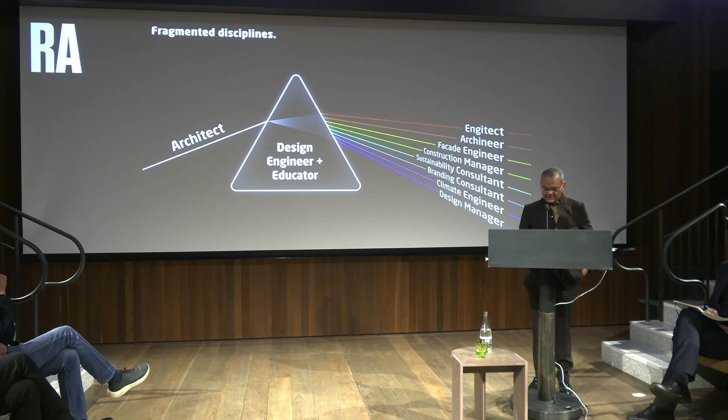I noticed also that the discipline historically has been fragmented enormously, to a point where today you can be an engitect, archineer, facade engineer, blah blah blah. I wanted to bring all of that back to what Soane did, which I think was the total builder, client, and everything else. Now of course that's a retrospective comment, but those are the kind of things I was interested in. And this particular observation has gotten worse.

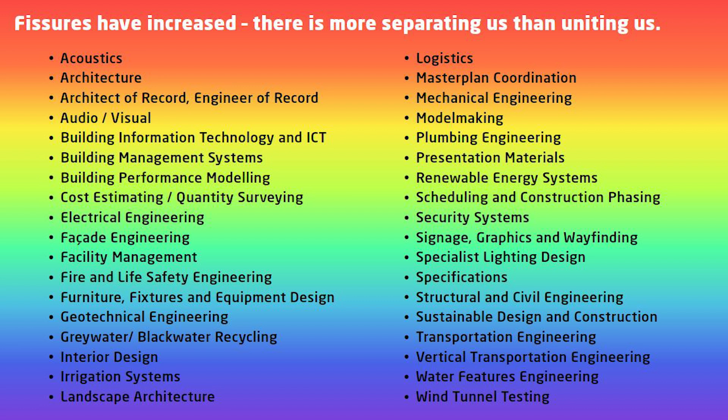I just made this slide very recently - in one of our projects there are 36 fissures. So there is a real opportunity, because there are more things separating us than unifying us in the world of making architecture and making design.

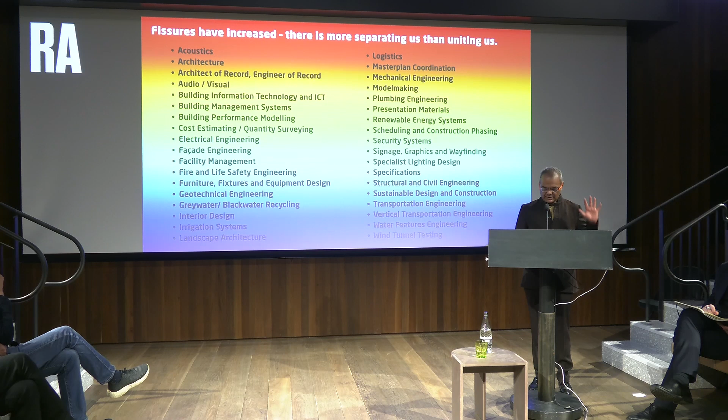And I thought, how do I then project this and continue at least propagating what we might be able to do. So I'm not going to show a lot of projects, because that becomes a show and tell, and I don't want to do that. I want to try and explain how I think I've got here.

One of the things is examining medieval methods - you very quickly realize that we have lost a lot since then in terms of what we do today. To fast forward that quickly, I'm particularly interested in interdisciplinary conversation, which means integrating knowledge from different disciplines without losing the strength of your expertise. It's subtle, but it's something I believe in very strongly, that I think is fundamental.

The problem is the transdisciplinary crisis that we have needs all of us, and you cannot do it through any particular discipline. I think when we look back all the way to the coherence of the medieval Summa, which gave way to this kind of specialization, we start to see that we need to find another framework of unity.

So as a kind of response to that, the practice that I have designed with my colleagues - and I want to thank them, there are many of them in here, my co-pilots at AKT - I don't do all of this on my own, by the way.

I decided that my role would be to step back as well as do some amazing buildings. I would also try and theorize at least what we could do as a practice. That's been a very deep interest, both academically and in practice, and we've published quite a bit of that.

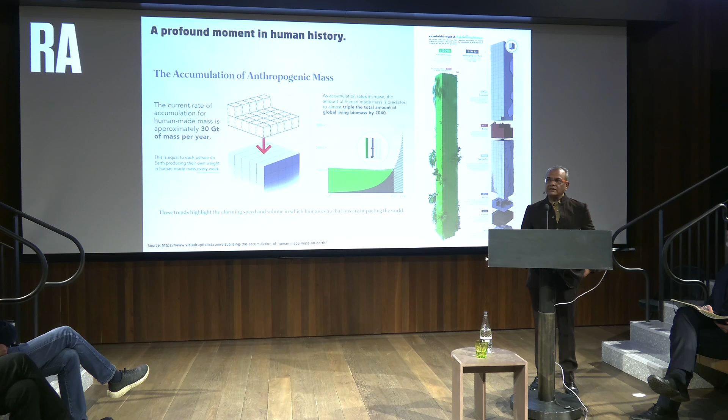The other dangerous thing that's happened is in 2020, we started to think, where is the crisis? And at the same time, 2019, 2020, we discovered that we as society had exceeded the anthropogenic mass. In 2020, the Weizmann Institute showed us that we'd made more material than what was already there from nature. And what's worse is by 2040, we will actually triple this.

The other important provocation is the two front lines, one planet that's de-globalizing, and yet we separate this global south and global north. And when we look at old research, this is not new, we see that all the new opportunities are going to be in the global south, and we are going to have to live with everything we've already built and improve that.

So there is this binary kind of research, yet it misses out Africa, it misses out the Middle East, it misses out all sorts of things. But nonetheless, I took this as a position.

And I thought, well, what about the 2 billion people that are living in informal houses? Why are we saying we shouldn't build? So there are these sorts of questions that struck me, and I started looking more and more at it.

And I see that in the 60s, there was a hypothesis, and many of you will be familiar with the population bomb. The hypothesis was, by Ehrlich and others at the time, that it was those poor people over there that are going to kill the rich people over here. That has now been proven wrong.

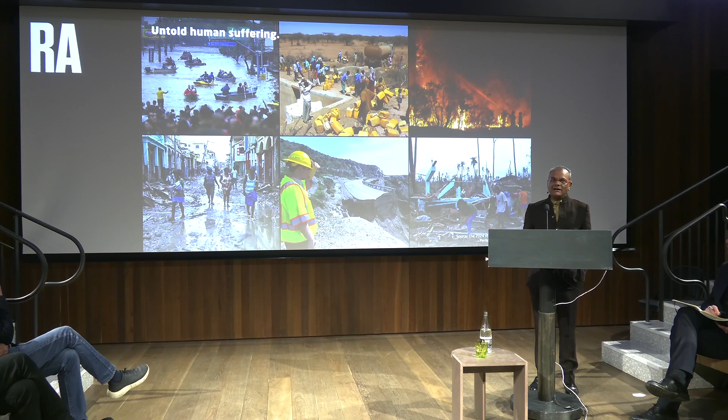Most of the problems have actually been upside down. The problems of the others, as we call them, have been largely created in reverse by consumption, not population. So it became quite an interesting thing. How does an engineer start to deal with that? Because all we're supposed to do is make buildings stand up.

When we look at the life support system of the planet, we see it's getting worse and worse. We've crossed recently, assessing 9 boundaries, we've crossed 6 of them. So in a way, there is a crisis going on, but I'm still very hopeful and very optimistic.

And I think in that hope, I've started to, since 2017, rethink everything we'd done before that and look at excellence in a completely different way, with new insights, new ways of thinking, but redefining more than anything else what value means. Value to us in our office, whether my colleagues believe it or not, the way I try to shove it down people's throats is, look, these are the 3 things we do it: value, complexity, efficiency.

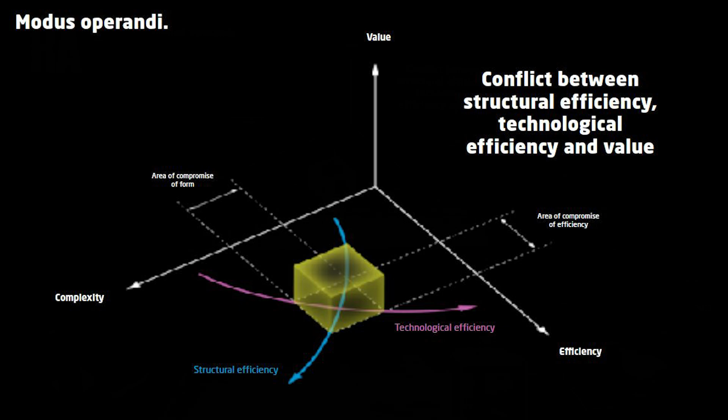We do this as a conflict, as an engineering office. There's a conflict between structural efficiency, technological efficiency, and value, because you can't have all 3 at the same time. This is how we used to do work for the last 20-odd years.

The modus operandi now is a sharp turn due to this reimagination, where I feel that the small cube that we were operating in before, because we were kind of compromising all 3 in order to survive, has just gotten bigger through the crises that we talk about.

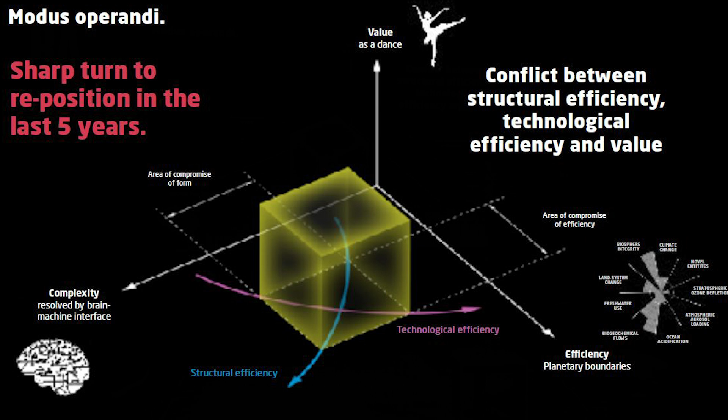Because now we can define value not as a statue, but more as a dance. We can see that complexity is solvable using any kind of computation, brain-machine interfaces. And efficiency can only be dealt with through the planetary boundaries.

So that has become actually why I'm hopeful, because I think there are fantastic and huge opportunities around the corner, and the practice is working on this basis.

Now, you might say, well, what about the next generation? And I am very conscious. My young daughter's in here. I have 2 young daughters. And I know that the next generation can imagine this as a kind of endless, this is the end of the world, it's doom.

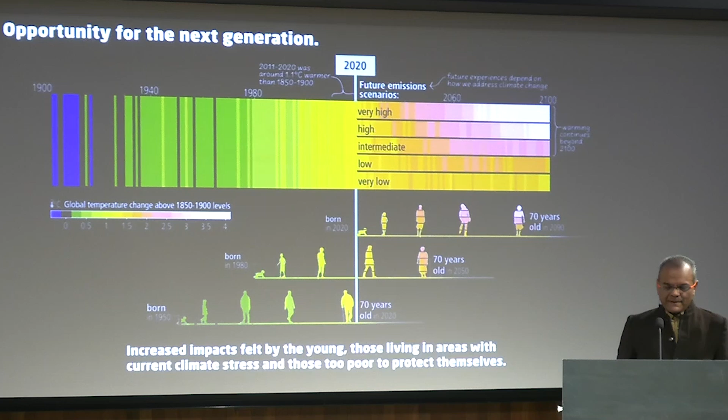But when we see and when we understand that, yes, their anxiety is coming from the fact that if you were born in 2020, roughly, most of the problems of climate are already here.

My argument is, and it's based on all the work I've been doing, is actually, even though we know that increasing impacts will be felt by the next generation, that is actually the first generation that can do things sustainably. And to assume that our great-grandparents and the world was in balance is just not true.

We were never sustainable as a society. All that has happened is the way we consume things has changed drastically.

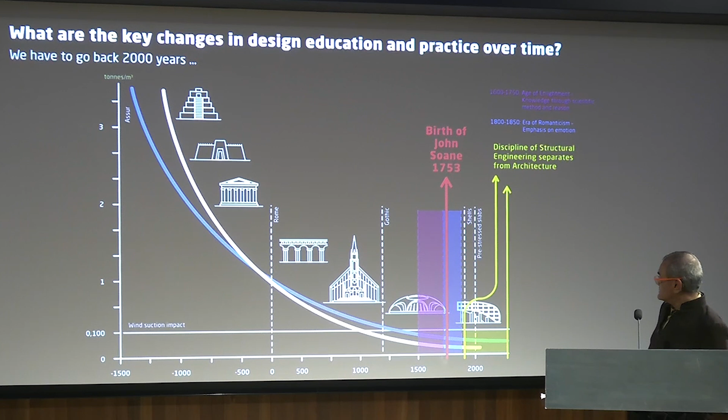So if I move to my last but one provocation: John Soane was born in 1753, which Simon Ofer tells me he never used to do calculations, but it was about that point. What has happened over that time, in very broad terms, is we've gone from a situation where he was doing the model on the left to a situation where engineers were invented at some point.

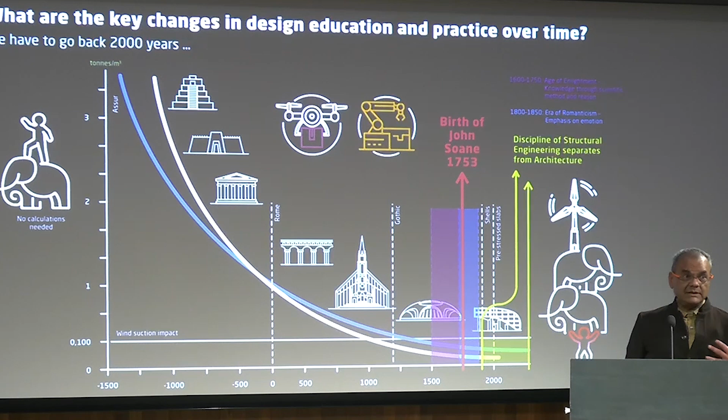And we're doing the situation on the right, picking up an elephant through calculations. It's gotten worse as time goes by. We're doing more and more through that model, and I think this discipline of structural engineering in itself has been in denial. At least my institution doesn't agree with me, but that's a good thing in my case.

I would argue that this way of thinking needs to also go back to finding some kind of unity, and I'll explain how we've tried to do that.

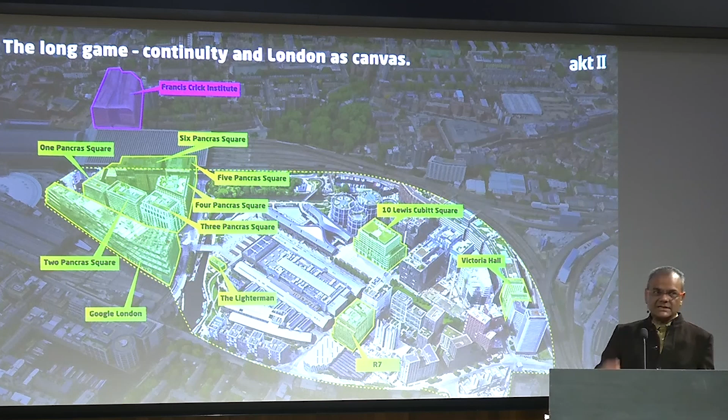So in London, for example, you have the most amazing opportunity, and things that have shaped our minds are really projects like this, where for 25 years we've been working on one building after the other, to a level where there are not many parts of the world where you could gain this kind of experience and some of the provocations I'm putting to you.

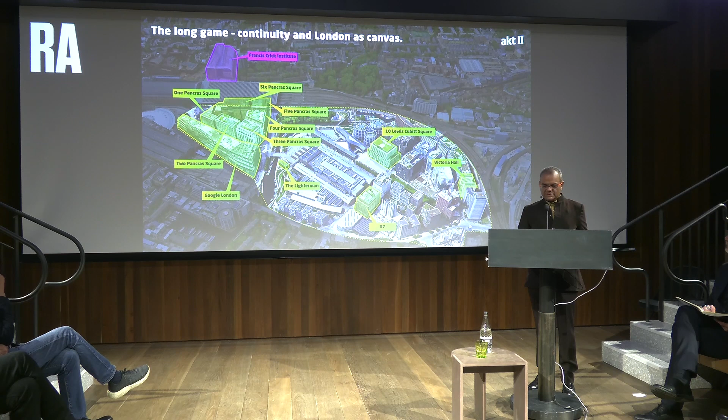So the continuity through this city, which has always been built on city past - many cities are built on cities, but we forget. There's a long game that we learn in what we do as designers, and I think we've benefited from that as a practice.

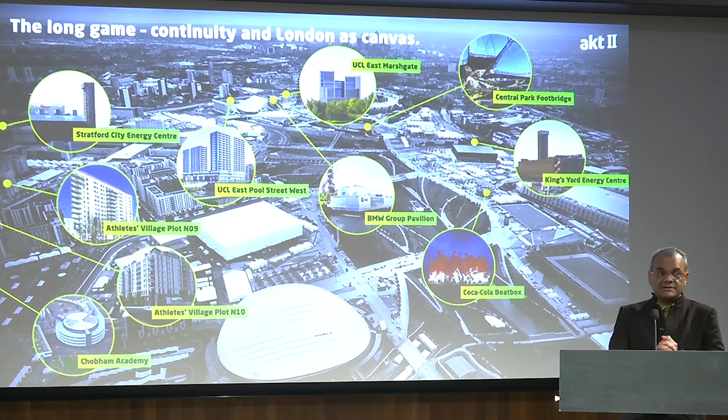Sometimes, like in the Olympics, these things happen at very fast speed, and we were fortunate enough to be involved in a number of projects there. So that has helped shape the way I'm trying to explain this.

There are other influences. Over 40 years, as well as my own office and my partners helping me, I've been fortunate enough to work with many parts of the world and many other institutions. The Aga Khan Award, which is 40 years old today, I've been involved in for 20 years. The director, Farrokh Derakhshani, is here.

When you look at the range of projects over 40-odd years and the data, you learn about the other - you learn about architecture in other parts of the world, different scales, different types of architecture. So I've been using that as much as I can to develop what we do.

That particular award also has an amazing collection of people over time. Almost everyone that I would love to meet or hear speak, because you're inspired by these people, I've come across through that award. So there's been a lot of development and thinking gone on through these people and through the awards, and I'm really happy it's helped me over 20 years to shape what I'm saying.

Getting into projects very quickly - if we go back to Islamic cities, for example, we realize that modernization should not be something we should be afraid of, because in this particular project in Masdar, which some people say was a failure and has been a super success, we measured with Norman Foster and partners all sorts of ideas from 4,000-year-old cities in terms of how they've survived.

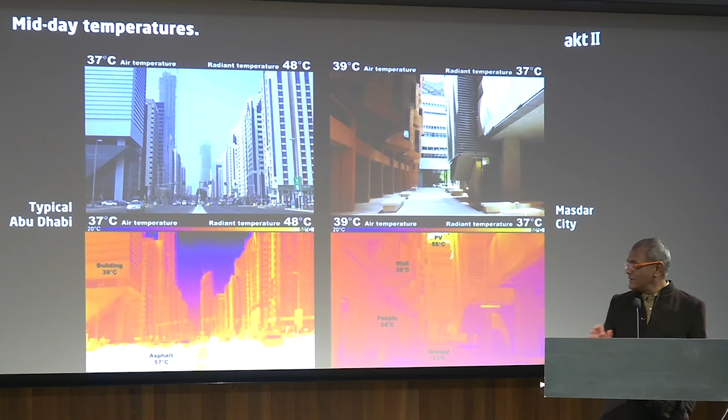The outcome was that we achieved 5 degrees difference in temperature. And remember, we're trying to target 2 degrees globally, in one particular street, on a particular day. So post-occupancy - going back and measuring and checking some of these things - has been super important.

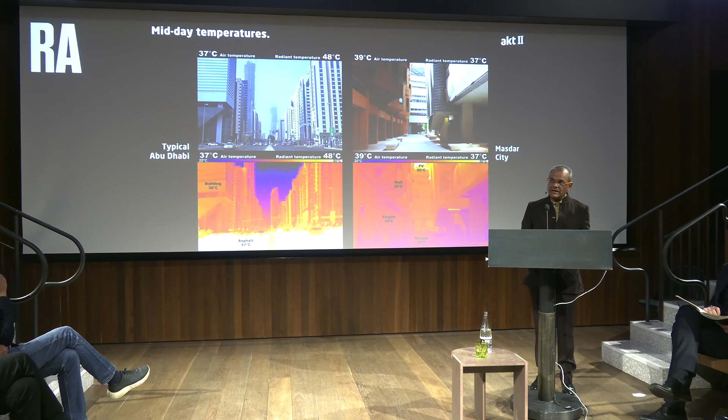And if we don't modernize properly, we're threatening ecology in some way. Moving through that kind of thinking, extreme environments are where you get quite a lot of benefit.

And in Sharjah, we started to do work with cooling sections. My colleagues measured everything, and we designed a very simple garden where new types of plants are growing in an urban condition. So through technological moves, we're able to bring things back from history. This is today, 3 years later, grown into something quite incredible. And most of that was done through very soft, very beautiful architecture and design, but also weapons-grade tools in terms of technology.

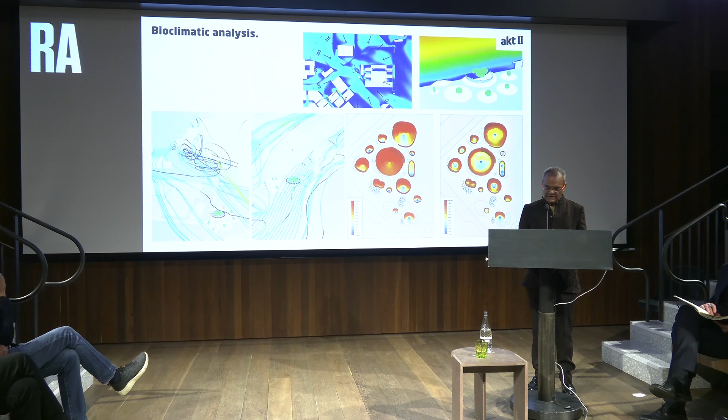There's a lot of that stuff available for us, and it scales up. In the same region, 10 years ago, we won a competition to catch the wind in Sheikh Zayed National Museum, and it's just finishing now. It's taken a while, but we're able to do these things.

Extreme environments, as they arrive here and other places, are not something to fear. It's how we mitigate and how we might deal with it through design. And it doesn't just rely on our species.

We thought of flying one up, changing the concept of a drone as a weapon into a tool, saying, how can we take a drone to put this up? It's a beautiful building, as you can see, and we managed to do it with helicopters in the end, but the idea really was, how can we get past a donkey when you need to build up there, in places in the world where this is still going on? Humans and donkeys are trying to get to these environments. The unfortunate thing was the drone people backed down at the last minute, and we had to use a helicopter to do it.

Global shifts continue to conspire our thirst for unprecedented solutions to the high-rise building. I want to say that those that say we shouldn't build tall buildings are wrong. I'll repeat that. There are many engineers saying it. I totally disagree. I think that we can rethink them.

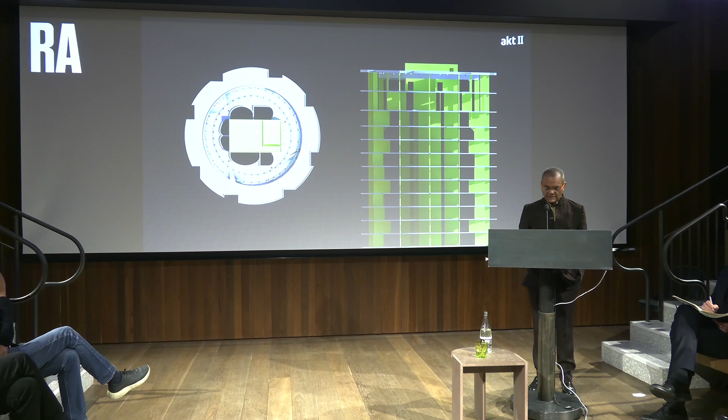What you see is, again, some of the tools that we use start to allow us to do complexity. Here, the columns walk inside the building to allow every room to be different. I repeat that—the columns walk inside.

At another extreme for a tall building, the Central Bank of Iraq, a completely different pendulum of why a tall building should be done. You can see in the context, when Zaha Hadid was invited, we had a long conversation about whether or not to do a tall building. Very simple answer: yes, of course. This country needs repair, it needs pride, it needs a societal change. Why wouldn't we put a tall building up there? But what kind of tall building should it be?

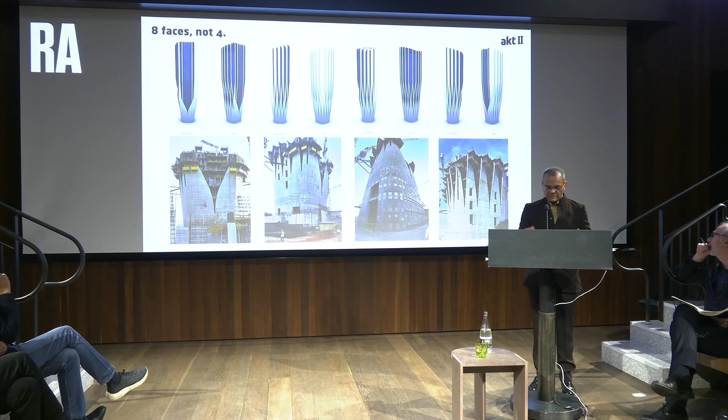So we invented one which is very solid at the base, because it needs protecting. But we made it such that, through those tools, it has many faces. It deals environmentally with something that rotates and comes out of the ground and opens up as you go up the building. It's taken a few years, but inshallah, it'll open next year.

The second part, then, is the quasi-discipline—those are kind of the headlines. What do I mean by advanced reverse design? In some ways, simplistically, it's a way of walking back through the work of others and moving forward at great speed so that we can actually create new ways of thinking. So not ignoring the past, nor relying on it. What are the new tools? How have the codes changed? What has happened to material? And when you do that, it's amazing.

This wasn't out of thin air. In 2019, the report on net zero embodied carbon became the big discussion. Having tackled energy, renewable sources, and so on, the big question now for the climate crisis is, let's try and deal with the embodied carbon of materials and the buildings themselves. Born out of that emerging concept, we've taken the whole idea in a different direction. Instead of allowing this kind of fragmentation, yet again, I see it in schools, I see it in practices.

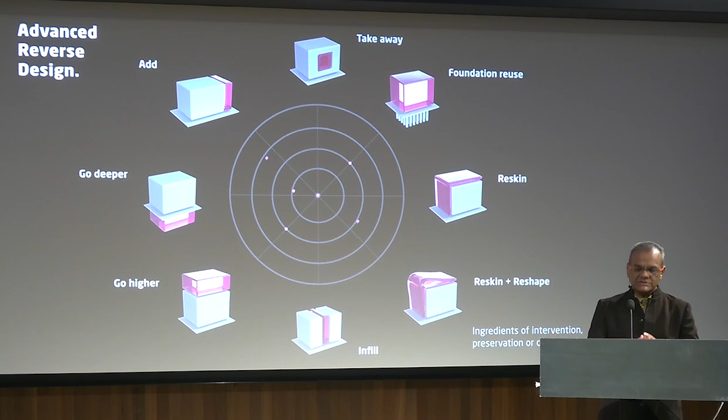Today we have experts in architecture who, instead of doing hospitals, only do adaptive reuse, refit, or reuse, all those things. We've collapsed that into something very different. In our version, we're putting it all into one bucket that deals with advanced interdisciplinary responses, combining all of this knowledge and trying to respond at speed to whatever the question might be. It's not only for old buildings, and we've thought about it because of the tools and the way we work.

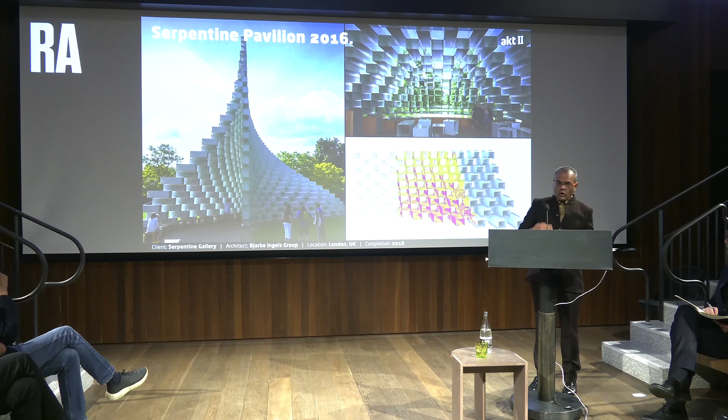For the Serpentine Pavilion, we were thinking, designing, and making all on the same day. It was that pace. We learned through that process that you can actually apply advanced reverse design through new materials. And projects like the Birmingham New Street Station, which was for Foreign Office Architects, which to this day I think not many people realize how important and interesting this was as a reverse engineered design building.

It was completely built in the 60s, dead, completely dead. And we returned it, and it's now one of the prides of the city. Other buildings that replicate this: the Angel Building with AHMM was one of the first in London where we managed to do something similar. Very recently, Liverpool Street. Both of these I brought in because they were both shortlisted for the Stirling Prize, so I'm getting somewhere with it.

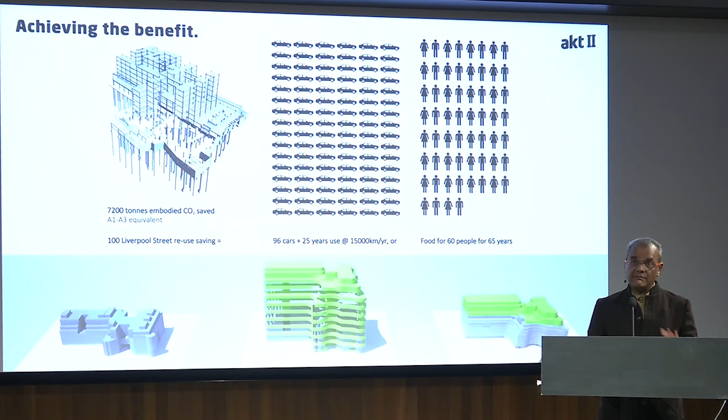In this particular building, we've done the numbers, even calculating the amount of energy we saved through retaining a 1980s building. What have we actually achieved? We're able to predict how many lives we think we've saved, never mind all the other data we can prove. So the highlight of that is more recent, with Feilden Clegg Bradley at the Shrewsbury Flaxmill.

I thought that would be very important to bring to today's conversation, because it was one of the world's first—it was the first iron-framed building, circa 1787.

So John Soane was in his 40s, so Simon is wrong—calculations were happening, he just wasn't looking at the right place. There were calculations, there were discussions. It was just that it wasn't quantity surveyors and engineers, it was clients, and they wanted to understand. They were corresponding on how to bring iron to the material, to the built world, and they managed to build something. It's taken us much work and many years and lots of historical information from the letters they were writing to each other to invent that particular building.

So we can go all the way back to 1787 and re-put this back on the market. Shrewsbury's happy, less crime, social impact—all of those are the targets that we need to capture. And it's not just about environment, there's more to it.

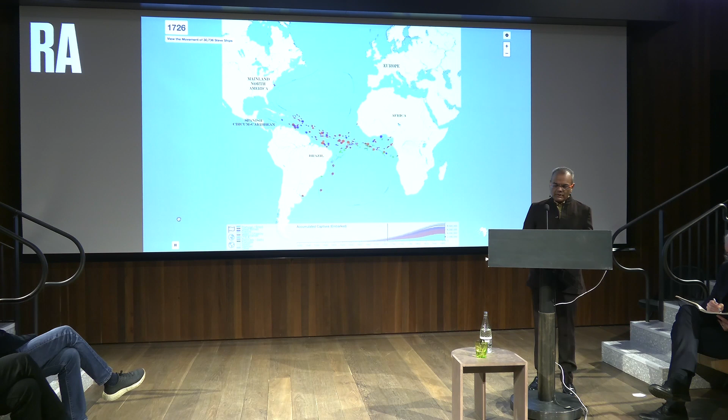In a way, that kind of continuity helps, because today we're working with—if the levelling up budget allows it—we are working with Feilden Clegg in Liverpool. Following the success of the first project, we successfully won the Grade 1 listed building in Liverpool, which will be the first international slavery museum.

At Regent's Crescent, where everybody knows this is a postcard building, as John Nash—we discovered it actually wasn't a John Nash, it had been destroyed, broken up. So we were able to persuade our government that Grade 1 listed buildings, when they're not authentic, should be reframed. And we managed to add a floor in return for that.

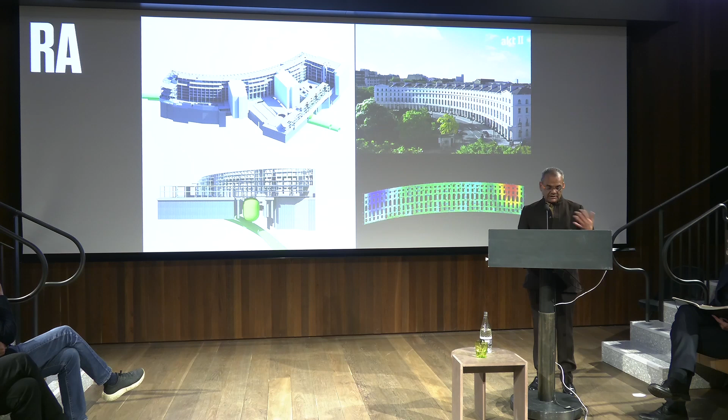More recently, on site now, the American Embassy, where it was Grade 2 listed—we discovered that actually most of the building was about to fall apart because it was built on American land, in a sense that we didn't have any control in terms of codes when it was first built. We managed, with David Chipperfield, to extend the floor and learn that all we could really save was the front facade of the building. We couldn't save anything else, and we retained that.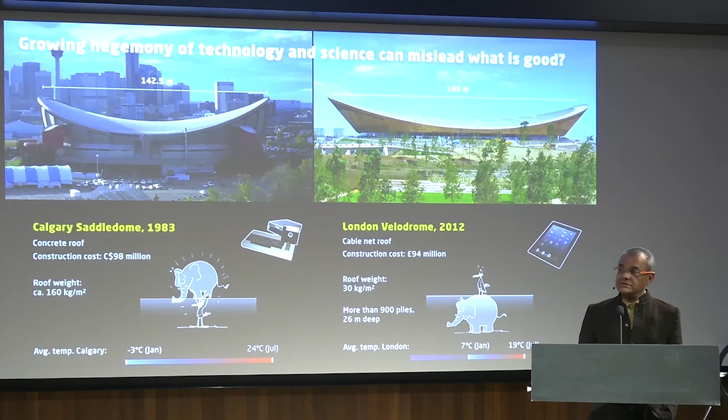The last one of these is about a subject that most people are not aware of—only engineers like me, who dream about piles and foundations, are aware of. So when we look at something as beautiful as the more recent Olympics stadium, the cycling stadium, the Velodrome, compare it to a 1983 Calgary stadium—exactly the same dimensions, same shape, both doing the same purpose. To time it, we were using those kind of typewriters at the time, and here we're at iPad level.

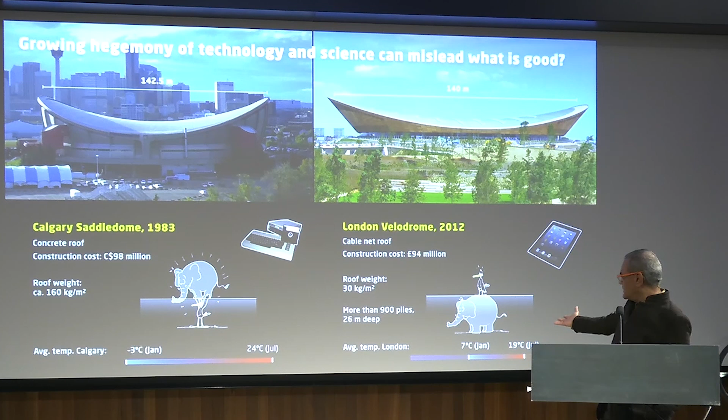When you look at the difference between the two, what you see is that one which is perceived to be wrong and that one which is perceived to be beautiful has another problem. Under there, the number of piles we put in that building are like that. We have destroyed that land for us ever being able to develop it.

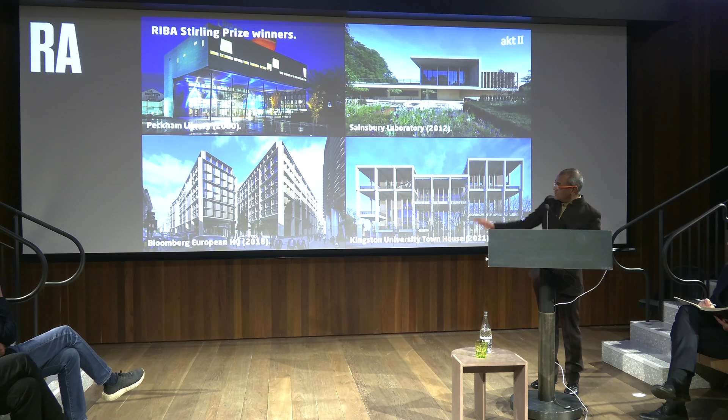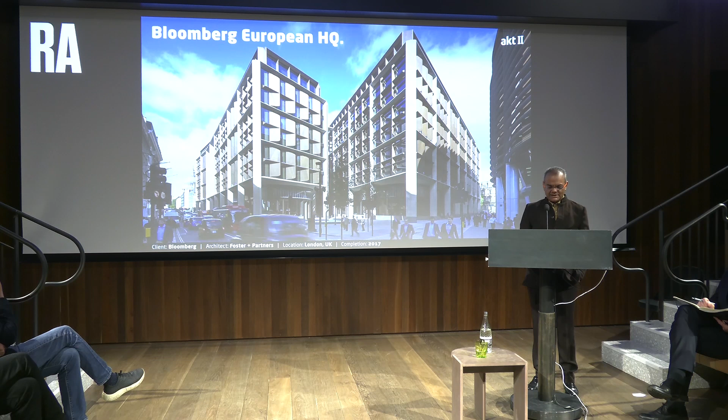This is a fact, an absolute fact, and I'm going to prove it to you now. From these four, which I could talk about in terms of the Stirling Prize, I thought I'd bring one to the table because it's a favorite of mine and many others. When it won the Stirling Prize, a lot of architects were anti this building. There still are people who say it's not great, but I think it is a marker for London in terms of design.

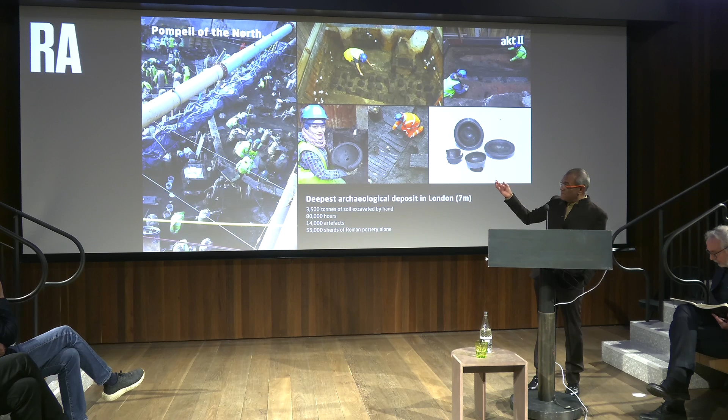So, as well as the Mithras Temple and Londinium, the beginning of London underneath our building, which stopped us for two years, what we discovered is what we'd done to the ground in the previous 100 years. All the grey piles are 4 or 5 generations of engineers just piling. The site was dead when we actually undid it.

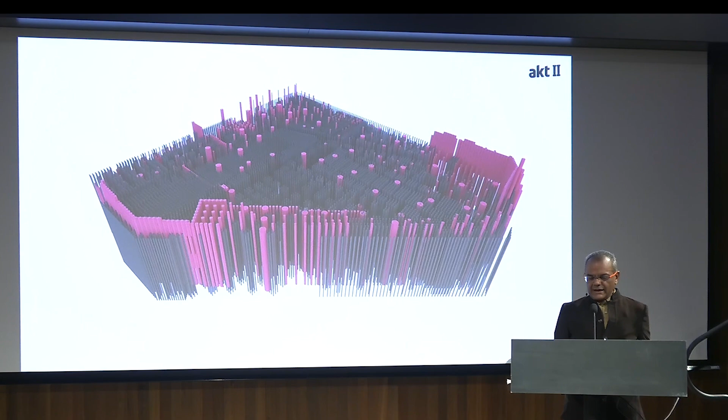As a child, my favorite toy was a marble. I used to trade with kids, taking their marbles in return for doing their maths homework at the age of 7. I was fascinated by this, because marbles are a whole, and they are beautiful in their parts. They were really beautiful inside, and I always wondered how you make a whole like that.

This takes me back to how I began my talk, that the marbling of technology, practice, teaching, and industry is vital in trying to sort our problems out. And there is a hegemony of technology and science, and if you're not careful, you'll forget that they're not innocent. You'll also forget the binary, and you will forget that you have responsibility and accountability, but more than anything else, most of the things technology produces has no soul.

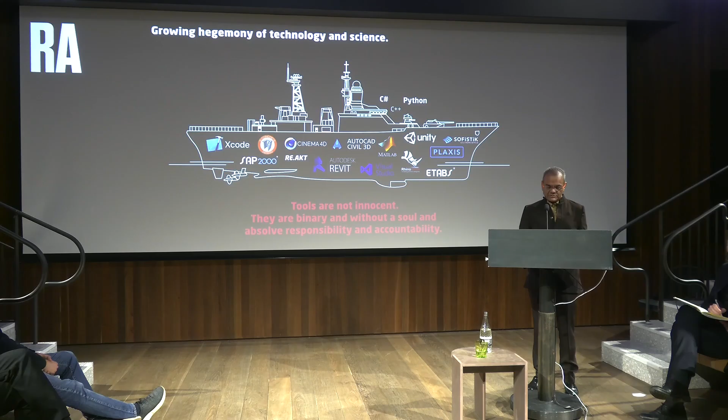If you look at materials, I'm going to go faster now. We evangelize about one material, we demonize another - we should never build in steel, let's build everything in straw. All those conversations frustrated me from 2019 onwards, because there was no science behind a lot of this, it was headlines. Fortunately for the next generation who kept asking us to do these things, we were able to see the reality of some of this.

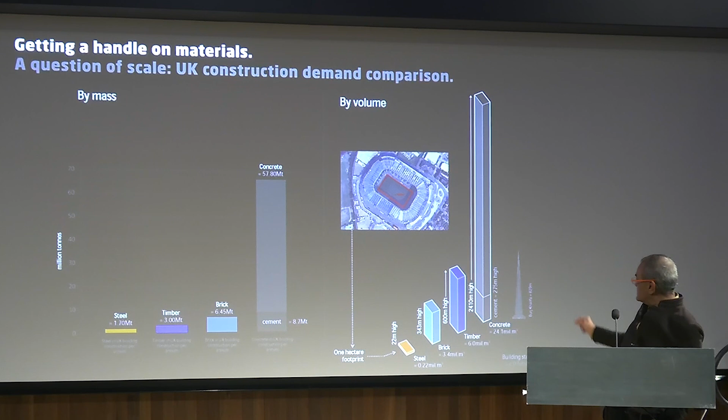So yes, it's true that we are building more in concrete than in timber, for example. If you put the footprint of that stadium, the amount of concrete we use is 2,500 meters tall in a year - so we do use a lot of concrete. Why don't we clean it up rather than say let's not build? The global south is not going to stop pouring concrete.

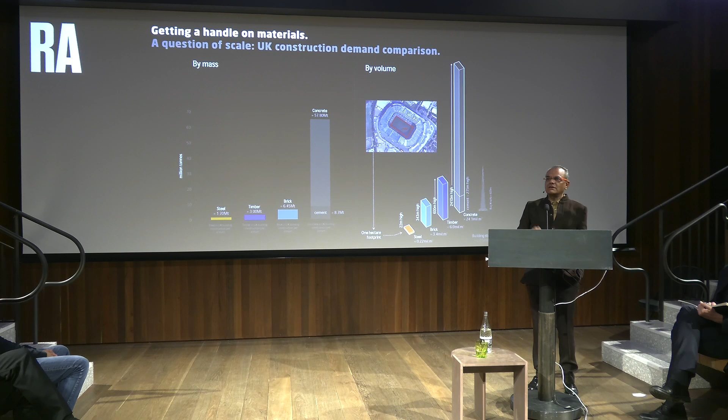So our reaction to that - David Watson is somewhere in here - our research group started to look at how we can capture concrete, working with Imperial College and people like Seratech. We're finding ways of actually cleaning up both concrete and steel. This, I think, is a much better approach.

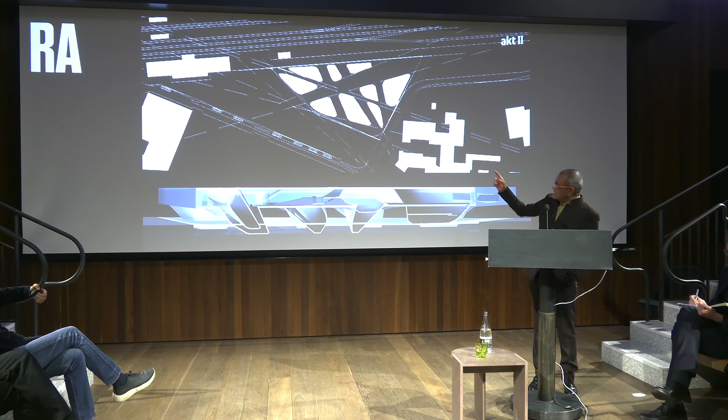Having created some of these problems, we're probably going to say that technology is what will get us out of here. This particular project, the Phaeno Science Center, was at the peak - I call it the Concorde moment in construction, because you can see the plan and section are nothing like any architect would understand from what we draw every day. When it was invented with Zaha Hadid's office, it's a single surface project, no grids on it.

Completely one big mass of concrete. And we managed to build it. Would we ever do that again? No, because it was so complex and difficult to do, and the tools we invented, the type of concrete we used, today would not work in the crisis that we know of. But should we never have done it? That's not correct, because it's projects like that and tools like that that also allow us to do buildings like this.

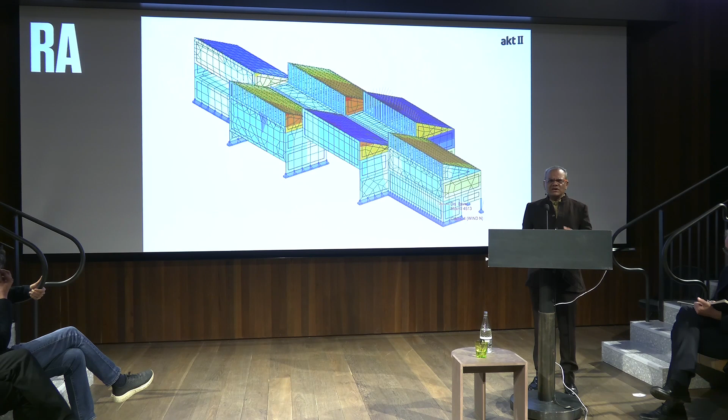So we use the same tools and self-compacting concrete that we learnt about from another project, one of David Chipperfield's projects at the Turner. So we shouldn't really demonize these things. There's a need to balance things.

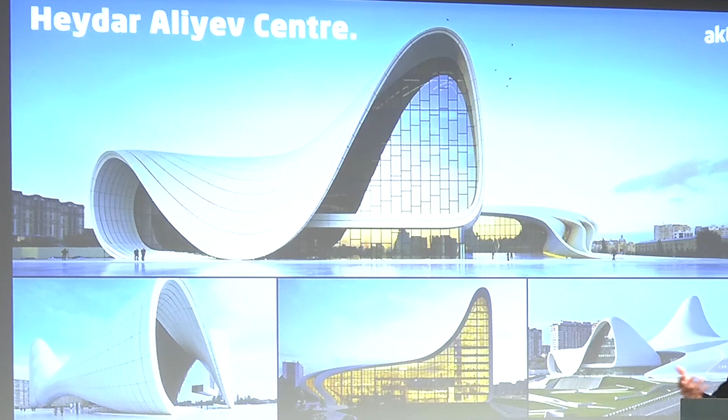COP29 last week was held in this building, which was one of the extremes that came out of Zaha's office at that time. You might say, why should we ever have built it? Well, same reason. Baku wanted Sydney Opera House, and why shouldn't they have it? Why should it belong only to Australia? Why can't Eurasia have some kind of pride? So there was a moment when we chose to do this.

We were almost stopped by the British government because at the time there was concern over there about human rights issues. But I bring it here because it has a 1,500-seater opera house inside it, which is one of the best in the world. Absolutely brilliant.

When we attended the opening ceremony, Zaha's office were very fortunate in that the King of Morocco was there, and he said, 'Can I have one?' And we did that. We did it, and we've just opened it very recently. Completely different context, same purpose, same function, but today it's on their currency. Look at the pride of that country in terms of doing a building which Zaha did in the Maghreb in Africa. So there are always reasons for all of these things, and I'm coming to the close.

I had to find a way of connecting back to Soane, and I discovered that on the Triumphal Bridge, he won the gold medal. I have always thought this was one of the things we all regret never got built. For me, this is one of the main things I wish had been built. We wouldn't have had to do some of the other things that have made headlines in terms of bridges in the world. This was the most incredible piece of work.

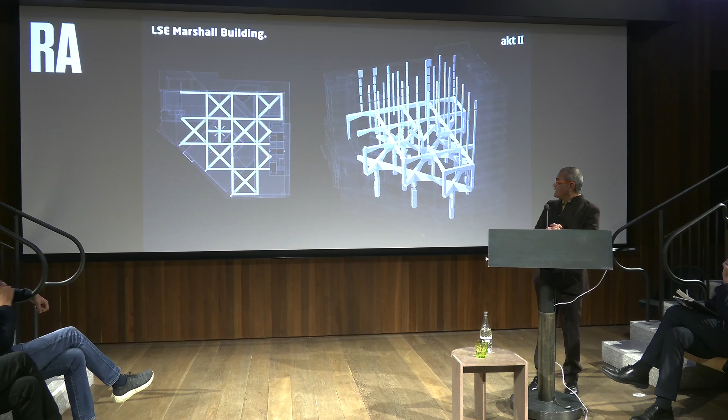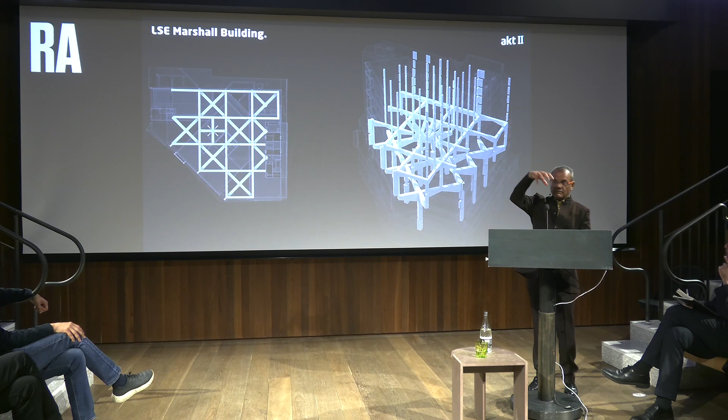I was very lucky that a project arrived that is very dear to my heart, across the road from the Soane, with Grafton. We had lots of conversation about their connection to Soane. But for us, it was about a vertical reciprocal idea. So the whole building is based on a changing grid of columns, many up at the top, but only 4 or 5 at the bottom, which is not new, but is certainly fast-paced in the way it used to be done.

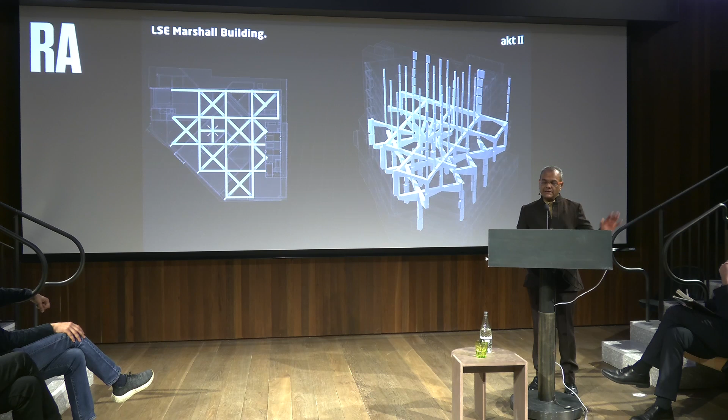At the time, it was questionable whether people would like it or not. The RIBA jury who went to select or see whether it deserved the Stirling Prize got it completely wrong. They didn't even shortlist it, which to me was criminal. But that's architects for you.

Ismaili Center in Houston with Farshid Moussavi, and the client is also here tonight—this was an international competition, much like all the work I've shown you. There are lots of stories to tell, but I only want to talk about one thing: the reciprocal idea. Farshid had come up with an incredible piece of work, which she will talk about one day. It's not my place to do.

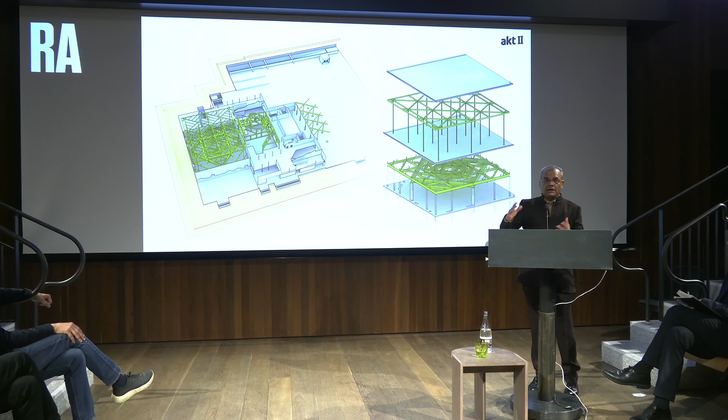The idea of building in Houston in that climate with a civic building led to a solution that demanded we go back to the dome structures. So all domes are done as reciprocal systems, and the prayer space in this building is a reciprocal system—it was a flat system, and we put an iwan on top, which is both Arabic and Persian, for a public space that has 3 open sides. You can see the connection back to Marshall and all the way back to John Soane, because there was a lot of connection in the work they did and how we solved that.

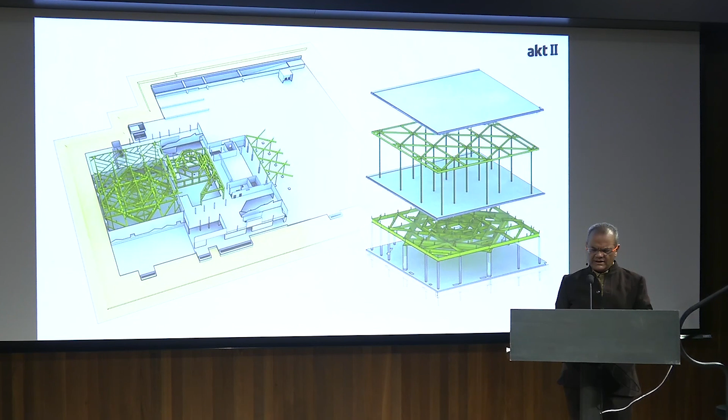And of course, you don't have to give up entirely. The central dome is also a reciprocal system, and it is absolutely gorgeous.

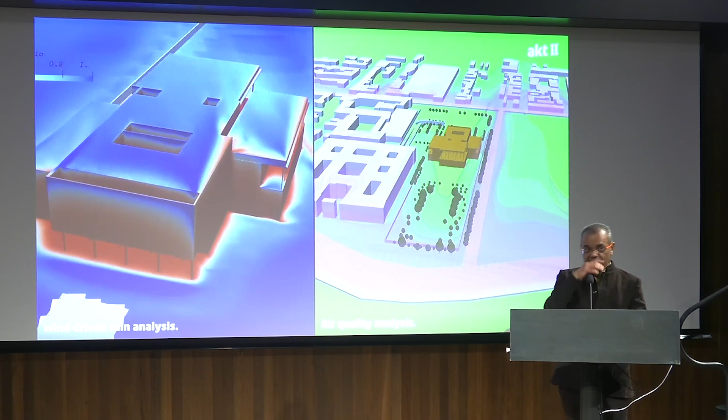What's interesting is that we also hijack some of these projects. Even though we weren't appointed to do certain things, our beta tools on how to measure wind-driven rain analysis or air quality analysis—because we've got a road going next to us—we started to operate on live projects. This was one of the projects we used to try and prove to ourselves that some of these tools work. Of course, we won't publish it, nobody's paying us for it. But you see the complexity of the building.

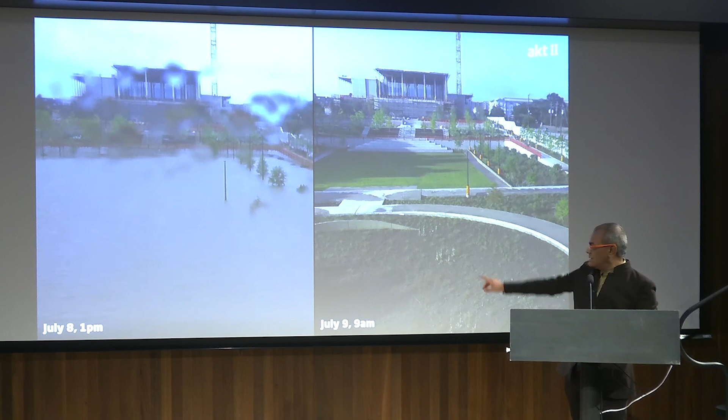In that vein, recently, July 8th, there was a flood—1 p.m., and it disappears by 9 a.m. The work of Nelson Byrd Woltz and the civil engineering work we were involved in, and Farshid positioning the building where it is, mitigates the climate problem already. A major hurricane, and within a few hours our site was clear, and you can see the garden was back to normal. The rest of Houston was not.

I want to try and rush through this, but I need to do it very quickly if I can. The modern and old mixture is not something I'm afraid of—we've done quite a lot of it. Al Muaji Fort, where we've gone to mud structures. Today we're working in Al Ula, I won't show the projects, where we're looking at stone and mud.

So we are looking at all of these questions that the next generation is asking, and sometimes those questions allow us to go beyond the remit. In this particular case, drones spray mud onto a tent in Milan in order to stiffen it. So we take mud structures and see if we can put them through the type of technologies we could use.

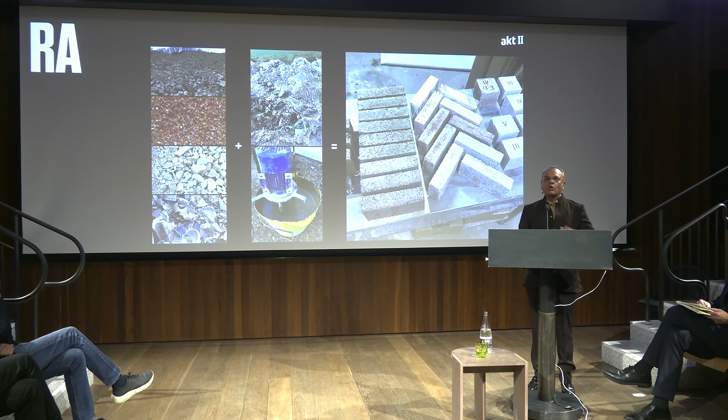Okay, I thought we were being clever with the mud. I went to Bangladesh and discovered this is how they make their bricks. Very quickly, the client persuaded me not to do it that way. In Venice, very recently, we've done something similar by taking waste and making bricks out of that. So all of that stuff in mud and straw is going on.

I want to bring in the silent ecosystem before I finish. I've been very fortunate to be involved with education—Mohsin encouraged me to work at the AA way back when I started the practice. Then I went to KTH for 5 years, and then recently 13 years at Harvard. That ecosystem has allowed me to question a number of things.

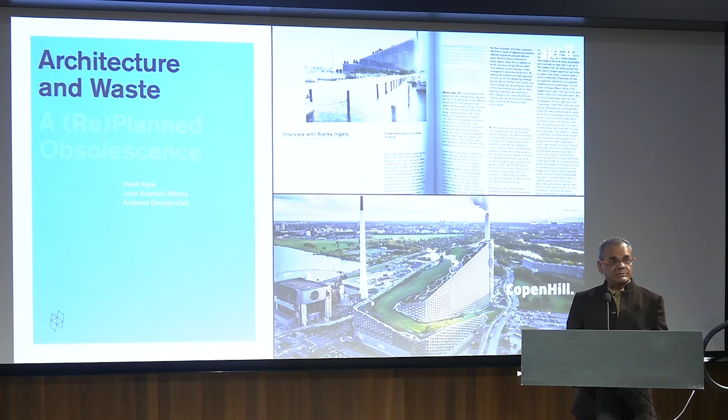One of the first pieces of work was really about the absence of architects in infrastructure buildings. The outcome was that building with Bjarke Ingels, which is a world-class waste station. And house prices have gone up by about 20% around that building, just so you know why we do these things.

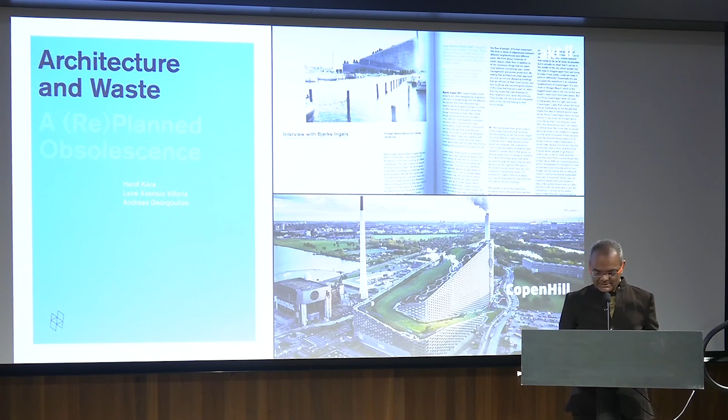In that kind of research work, I've also looked very closely at the use of CLT, first housed with Frederick Ludwig here in the UK in CLT, which is then replicated in a way in Atlanta. We wrote a very beautiful book about the use of this particular material and why it's not that sustainable, with Jennifer Bonner. So we continue to do these pieces of work, again teaching with Farshid in France.

I looked very carefully at embodied energy of all the biomaterials with my students. And then more recently with Amin, the stone towers that we looked at for the Earl's Court site.

So all of those things come back into play. Sometimes I snigger because these cute projects from our world, taking them to continents like Africa and celebrating them is amazing stuff for Instagram and all that publicity. But you have to question it.

When Marina brought, thanks to Neil, this particular Khudi Bari project here, the first problem we had is we don't have bamboo the size that they have in Bangladesh. We eventually managed to get it done, despite a lot of obstacles including insurance, safety, blah blah blah. We managed to build it. It was very successful. In the meantime we also experimented with its poison, the poison being the joints.

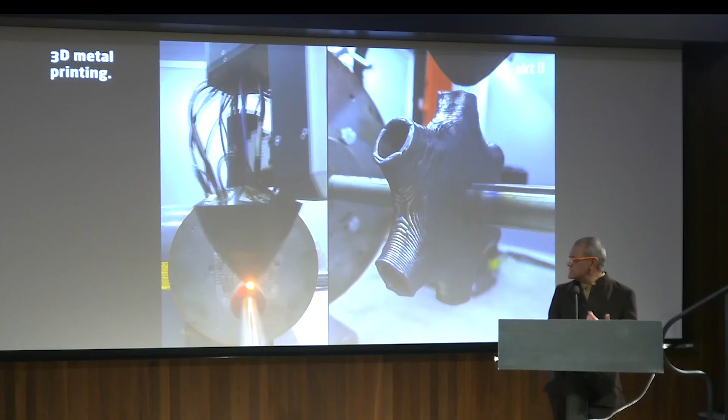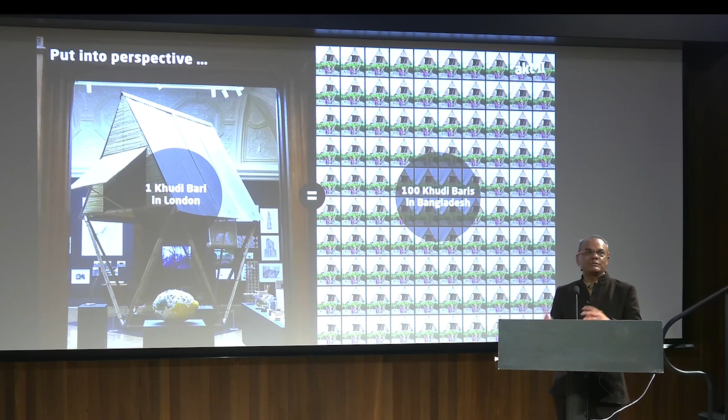It's made out of steel, so we looked at the way in which we could rethink the joint, and we're still continuing. But what's scary is that for the price of what she pays for one, we paid for 100 just building one prototype in here. So there is this balance of who is rich doing what and who is poor doing what that struck me when we looked at the price of the real one versus what we managed to put together.

I'm coming to the end. Two more slides. A very recent project, my colleague Chris Blust is in here somewhere. We won a design competition very recently for the Islamic Art Biennale in Jeddah, which had a very tough jury. I think initially 100 entries, typical in terms of calling out. Five or six were shortlisted, and we were very fortunate with East Architects and Rayyane Tabet, artist, architect, engineer, proposing together.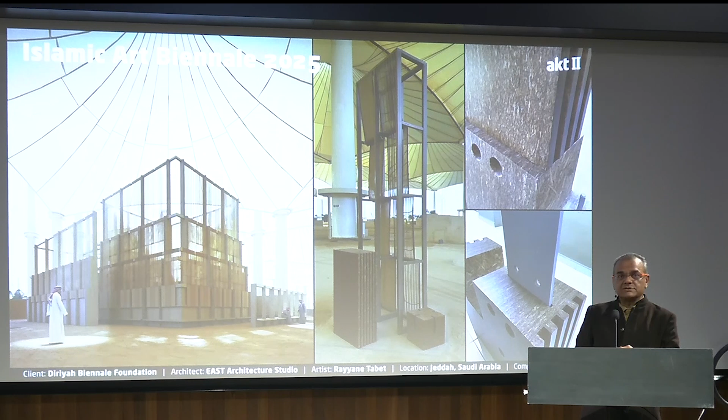This is the jury, not us, that selected that team because it was a unified framework of three people who believed in what they all did without fighting about it. We proposed the Musalla, and what's really amazing about it is we're using palm fronds to make it. So it's a new type of timber for the region that we are hoping will now go out to the world.

It will open on the 25th of January. I saw it two weeks ago just to make sure it will stand up, and if it doesn't, do I leave the country? That's the kind of pressure we're under. The office have done an amazing job, the collaborators included, and we are pretty confident that it's going to be a massive hit.

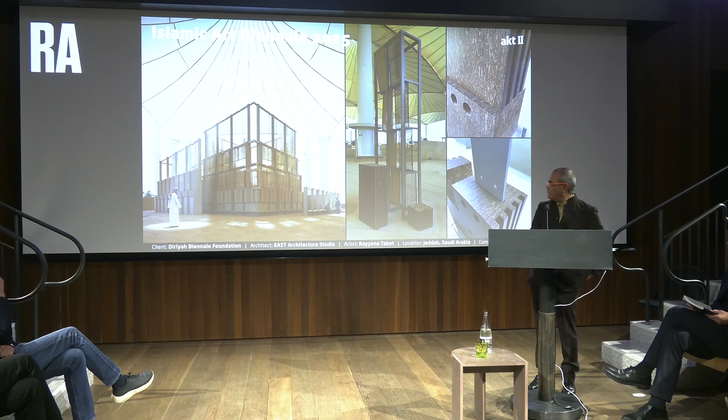Now, I had to add a project this evening because my dearest friend, Francis Kere, at 4 o'clock today texted me, I'm in London, I've just come in from Berlin, please can I come to your lecture? Can you believe that? He's a very good friend, and probably I was surprised by that text, I have to say.

We are together very excited about the Las Vegas Museum, where much of this is going to come together without Francis having to change what Francis is and what Francis does. I'm finished, and what shall I leave you with? What might the future be?

Well, I think that there is no doubt we're in a perilous time on planet Earth. Even in the recent research, we see 3 of the hottest days were in 2024. We witnessed record-breaking temperatures recently in 2024. I still think that we have to look closer at how to become more sustainable rather than the doom that goes with that.

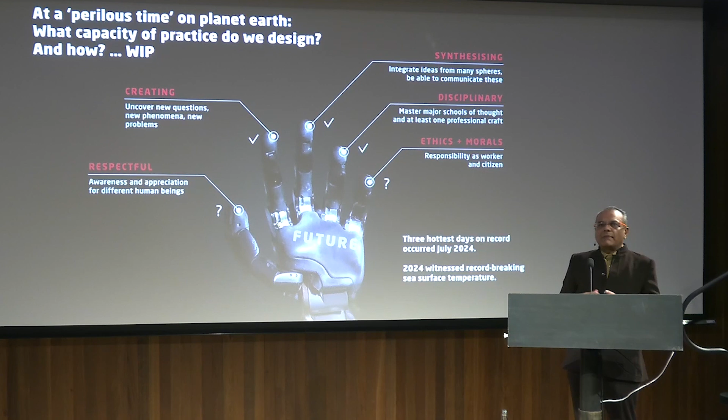And optimism isn't enough anymore. It is an urgent crisis, so we're not going to berate that. But the heaviness of the well-meaning martyrdom of climate, and the heaviness of the problem of climate, is holding back opportunities, and we need to find ways of doing better with that. I don't necessarily mean my generation, I mean the next generation is going to get out of this in some way or the other.

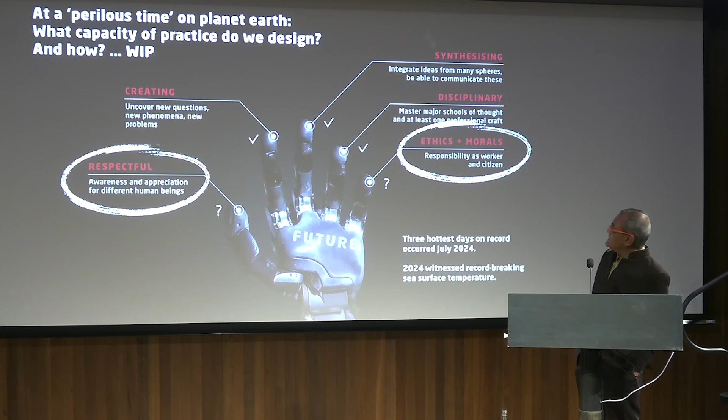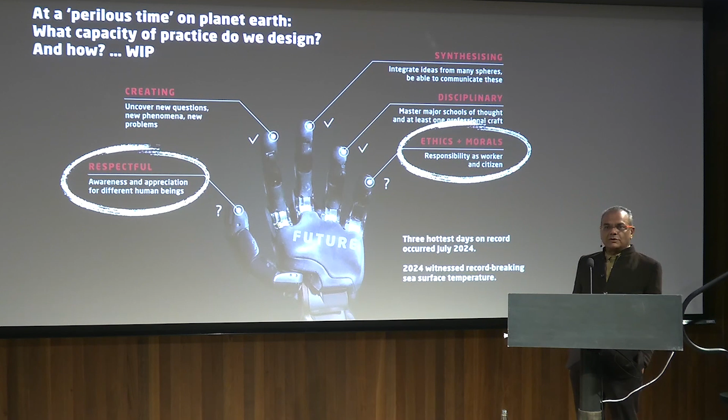The areas of synthesizing, creating, and disciplinary aspects of what we do are pretty well explained. The two missing aspects, to me at least, are the deep ethics and morals that go behind this, and that's what I wanted to talk about, and respect for each other and everyone else.

So I conclude with a quote from another historian this time, Arnold Toynbee. For those who don't know, he coined the word Industrial Revolution. He wrote that the 20th century will be remembered chiefly not as an age of political conflicts and technical inventions, but as an age in which human society dared to think of the health of the whole of human race as a practical objective. Thank you.